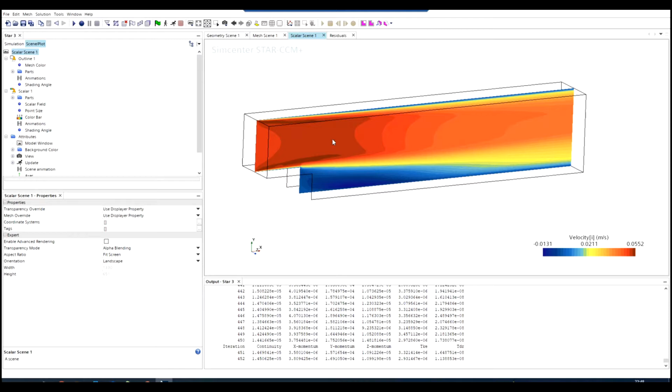Now we have the simulation result, and we will explore different post-processing methods. The first one is to plot the streamlines, so we want to see how the flow develops through the streamlines.

In order to do it, we should go to derived parts. Here is one I generated earlier, so in order to demonstrate, I just delete this one. We go to derived parts, right click, new part, and select streamline.

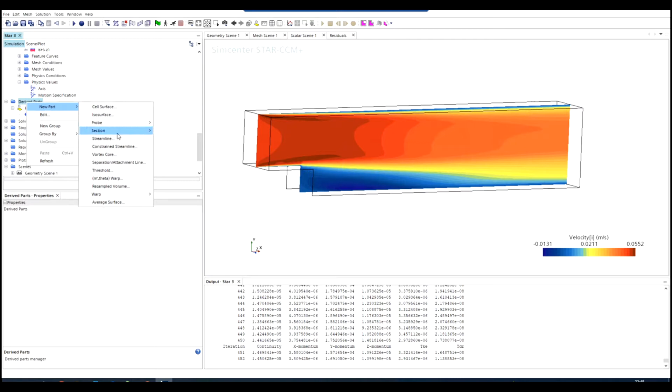Here is a window, we need to do some settings. The input part is the region we have, so if we have a look, this is a region, the entire simulation region should be selected.

Then the seed mode, and there are different modes. First is point seed, which means we have only one point as a seeding point, and the streamline will start from that point. Or line seed, so the seeding points are located along a line. And also part seed, usually it's a surface or several surfaces.

Here we will try to use a part seed, so the part should be the inlet, for example. We just choose the inlet under the boundaries folder, and we click OK.

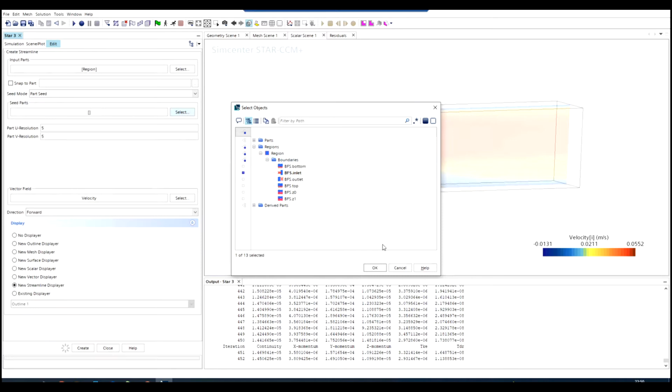Because it's an inlet surface and the resolution is in the X direction, here is Z direction with 5 points, and Y direction with 5 points. So in total we have 25 seeding points, and we will get 25 streamlines. If you want more streamlines, you can increase the numbers or the resolution here.

And a vector field, because we're plotting a streamline, so it's velocity. If we want to plot the vortex line, this can be changed to vorticity. And we will display it as a new streamline displayer.

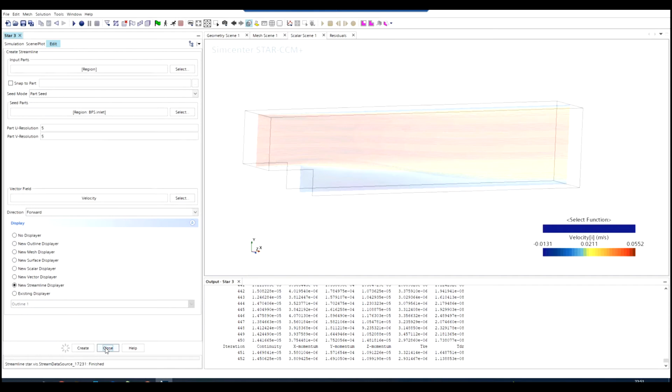We click OK and create, and you will see the streamlines are here. Then we close it, so all the streamlines are here, and if you count, there are a total of 25 streamlines. Especially the lower one is more interesting.

Underneath it's a recirculation bubble, and the flow, the streamline follows the curvature of the separation bubble.

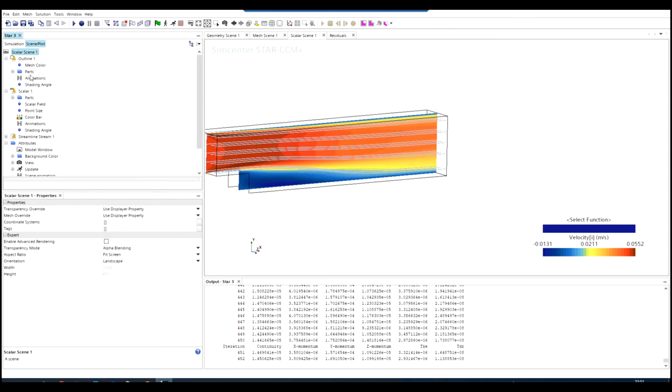If we now go to the Scene Plot tab, we will see the streamline. Because the scalar plot in the center plane is still showing, we double click to disable it. So now only the streamlines are shown.

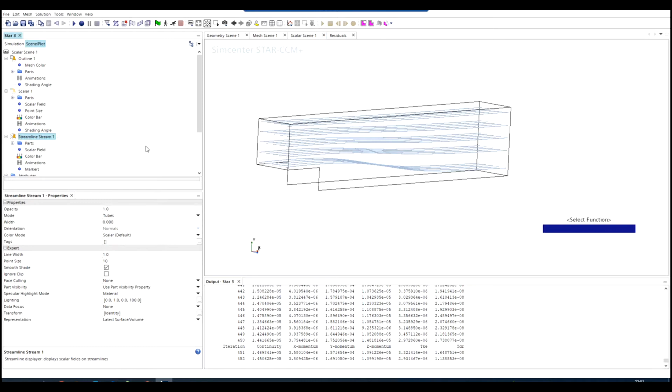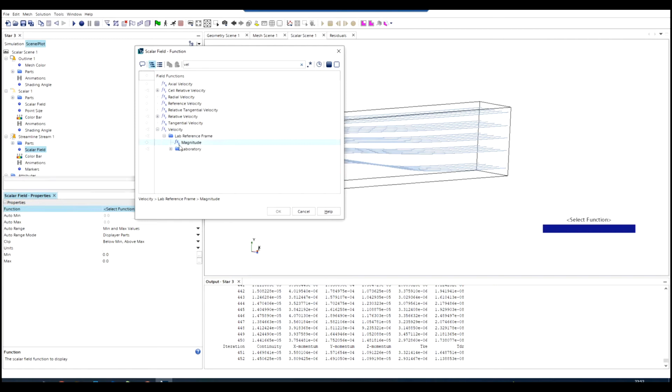There are several other things we can do. If we click the scalar field, what I want to do now is to color code the streamline. So if we go to the scalar field and choose a function, for example, I want to choose velocity magnitude to color code the streamlines, so we can see how along the streamline the velocity magnitude changes.

This is how we use streamline as a post-processing method, and this is a very basic one. We're using the existing surface or existing face, for example the inlet surface in here.

The question is, we can't see the recirculation bubble. In order to visualize the recirculation bubble, we need to create a plane or surface within the flow field, right? For example here, then the seeding will be located within the separation bubble.

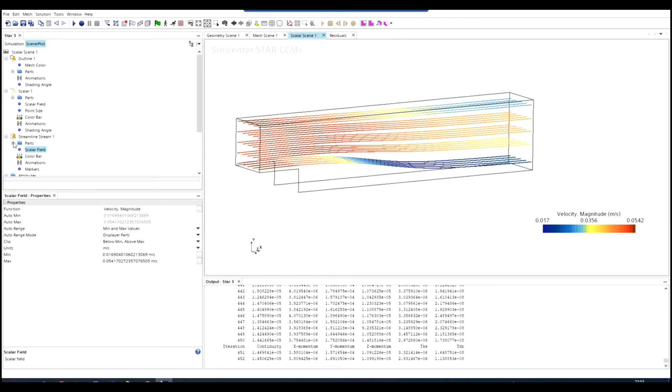So let's do that. What we can do is disable this one, disable the streamlines, and create a new one. But before creating a new streamline, we need to create a surface at the beginning.

Still, we need to go to the derived parts, and then we will create a section and a plane.

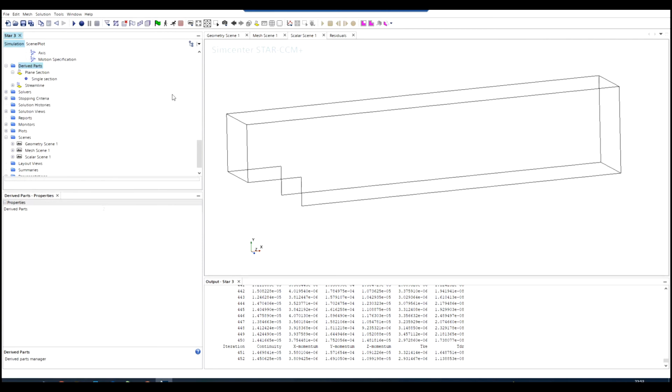We can roughly drag this surface, and now we're changing the orientation in order to make it better. So I just type 0 here, 0 here, and 1 here.

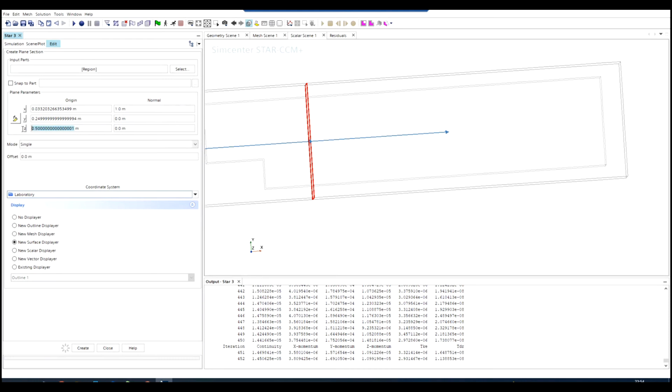No, it's 1 0 0. And the origin, let's say 0.2, that is, okay, the origin is 0.5 meter on X, and Y is 0. So that's the origin of this surface.

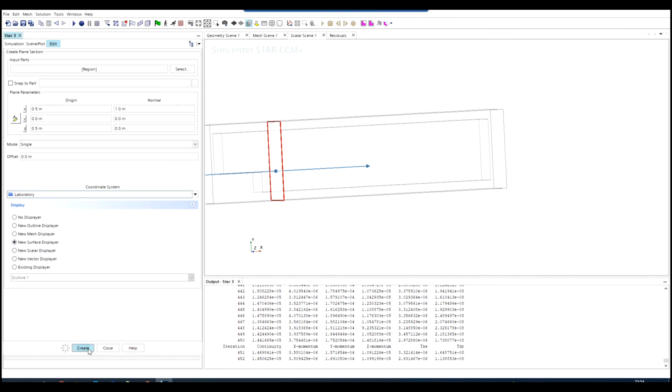We display a new surface displayer we create, so we get an additional surface. We go to derived parts, and you will see this plane section 2 will be here. Now we just create a new part.

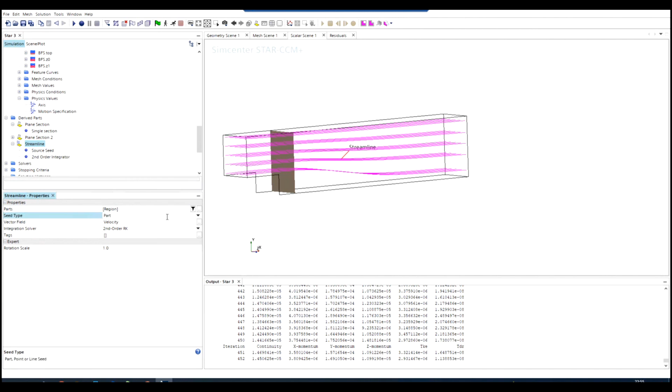Or we just change the setting of this streamline. We double click, or change the region here, change the part, seed type part. I think we need to change it here.

Our seed source, originally the seed source was at the inlet surface. Now we want to move it to this derived surface, so we just change it to plane 2.

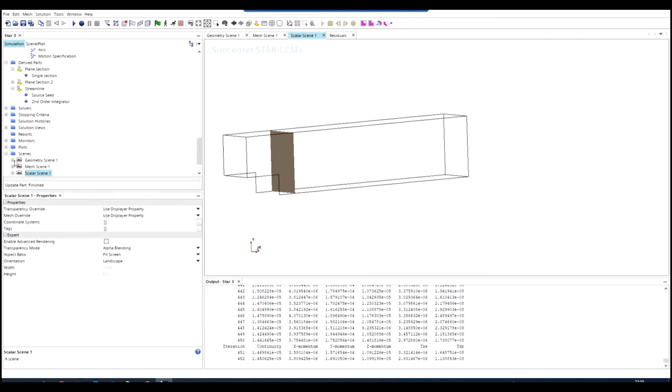So we have the single plane, still the resolution is 5 by 5. Now we should be able to see the new streamlines, and we can see the separation bubble now.

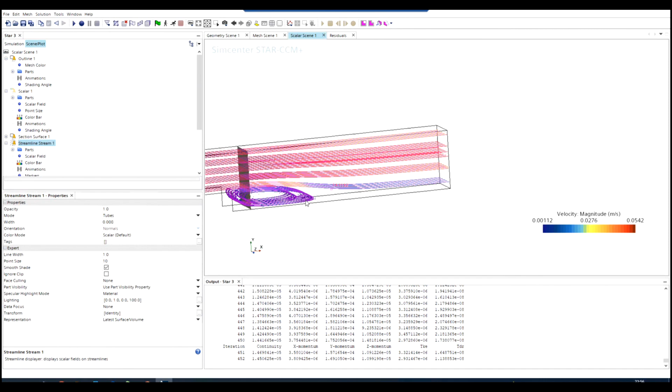Similarly, if we come here and enable it, we will see the velocity magnitude is color coded by the velocity magnitude. So this is how we generate streamlines as a post-processing method.